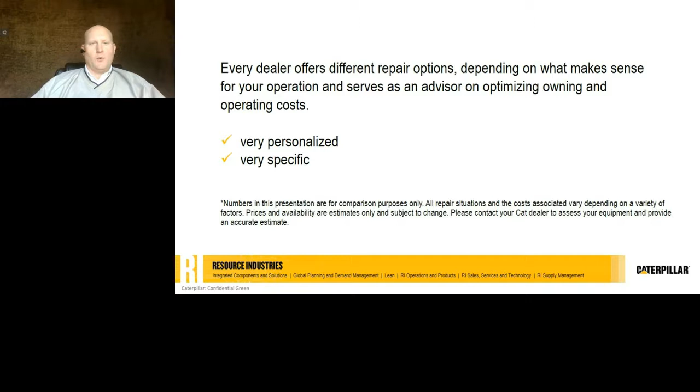Now we're going to move into the value of repair before failure. So why repair before failure? What's the benefit of that? As a lot of you can imagine, CAT parts are designed to last multiple lives, which means we've designed reusability into our parts, and we'll talk about the level of our parts in the next couple of slides.

We also have failures is expensive. In most cases, it's 2.5 times more expensive for an after-failure repair versus a before-failure repair. And also, when we run those components to failure, we potentially could cause contingent damage to parts that don't need replacement, and we'll talk about that in future slides as well. With the proper component management processes and procedures, 90% of the failures can be prevented.

And you'll see the chart to the right here. That's what that illustrates.

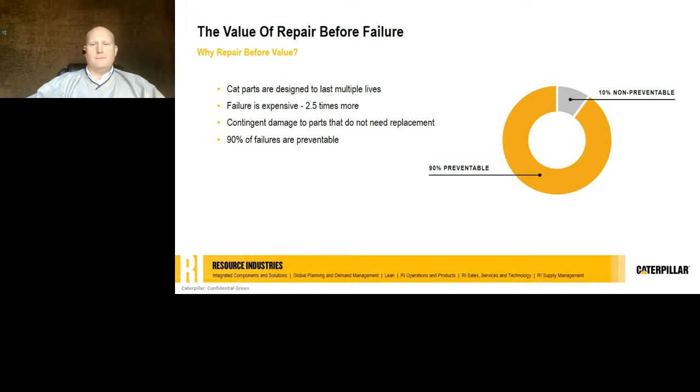Why repair after failure? So there are reasons why we would do repair after failure. One of those is why fix it if it's not broken. One of the side effects of that, though, is it will fail at some point and cost more to repair if we do run it to after failure. Repairing early will save money down the road as well, and we'll cover some of those repairs potentially in future slides.

Production demands require us to keep the machine running, so current production is more important than taking the machine down for future breakdown. But failure down the road could have a negative impact on the long-term production. So if we're not planning these repairs and doing it before failure, that could definitely affect our production targets and goals.

Turnaround time is too long. Every repair takes a certain amount of time, but the key here is repair after failure often takes longer than a before-failure repair. So keep that in mind.

And then we can't forget about the operator as well. Operator communication when experiencing machine problems could involve a lack of communication between shift changes, between the operations and production teams. It could be a different array of reasons why we might not communicate a potential problem, or we might just not communicate that problem because we want to keep that machine running so we can have production.

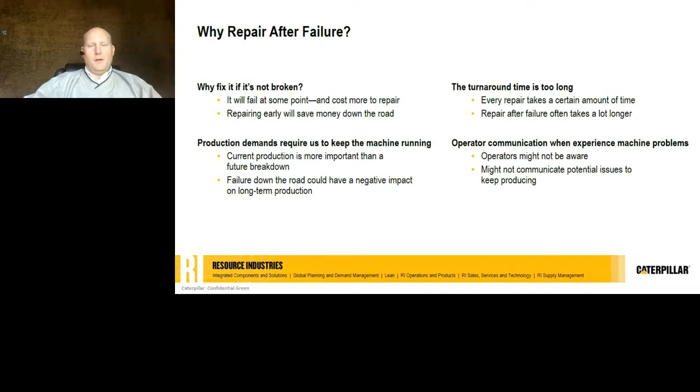Next, we're going to move into the levels of CAT parts. Each level has a built-in strength to extend machine and component life. But more importantly, we want to capture that built-in value of your overall machine purchase by reusing those parts that are designed to be reused.

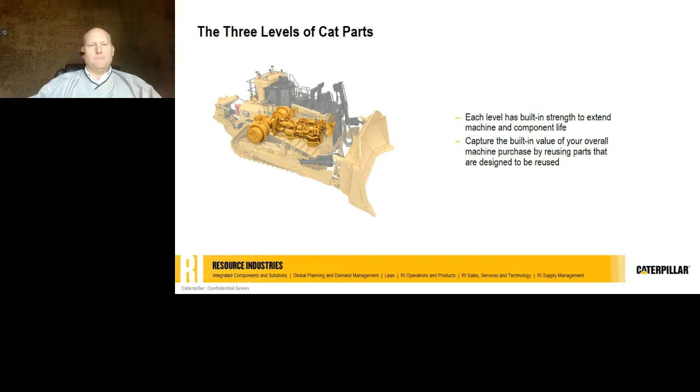Level 1 parts are your fast wear parts. So those are the parts that mate against those level 2 and level 3 parts that protect that investment. Those level 1 parts—I have a powertrain example here, and you'll see some pictures to the right—include bearings, gasket seals, piston rings, anti-friction bearings, thrust washers; those type of things would be considered your 100% replacement parts as your level 1 parts.

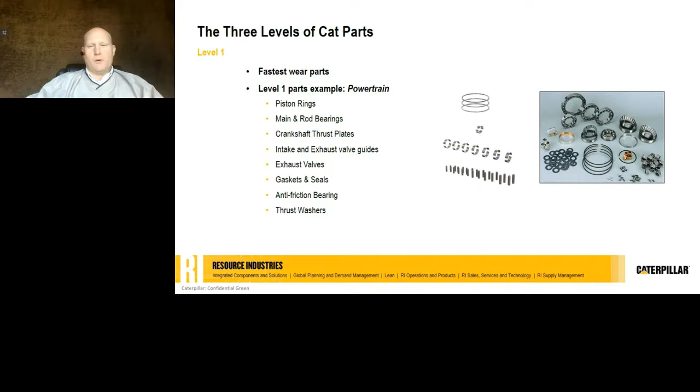Next, we're going to move into your level 2 parts. Level 2 parts are your slow wearing parts, and the key to your level 2 parts is they're designed with reusability in mind. Those parts are your pistons, your gears, shafts, discs, and those type of parts.

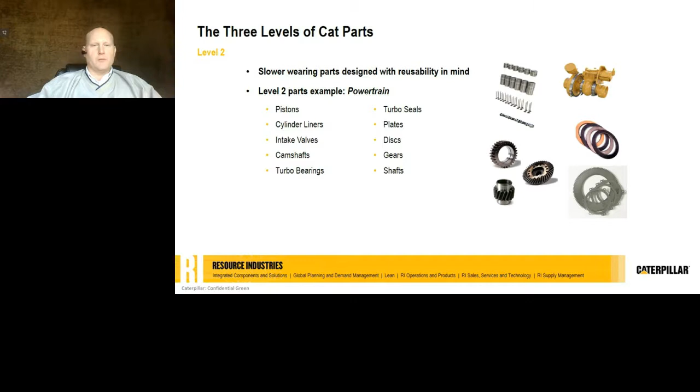Caterpillar has reusability guidelines and processes for our dealers to follow regarding those parts. We can either salvage some of these parts to extend their life, but if they do not meet specification, we throw those away. Your level 3 parts are supposed to be designed for the life of the machine. These before-failure repairs are critical. If repairs are needed, component failures can increase cost dramatically.

So if we're running the components to destruction or to failure, we don't want to be ventilating blocks or breaking wheel group housings and those type of things to where we can't salvage those items. Additional examples are your connecting rods, parts that have multiple lives and in most cases last the life of the machine, and should never need to be replaced as long as we're doing the before-failure philosophy.

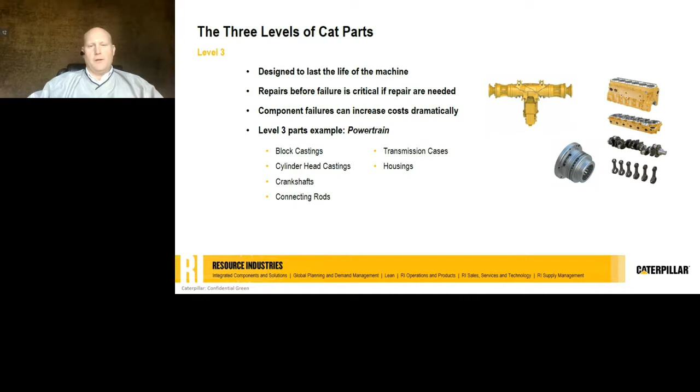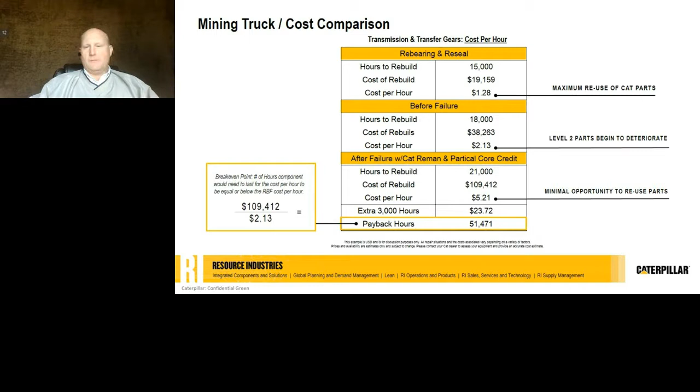Managing your CAT components, there's 4 areas that we focus on. First and foremost, you want to have good preventive maintenance practices, following the operators and maintenance manual. If you decide to do extended oil intervals, you want to make sure you have the SOS and you're religiously checking those samplings to make sure we don't have any contaminants in our oil.

You want to take advantage of your lower level repairs. In the previous example, you want to make sure you're not running those components, pushing the limit where you start deteriorating those level 2 parts and eliminating reusability, or running those components to failure where you have to start replacing those level 2 and level 3 hard parts. You want to pay attention to your planned and problem indicators, making sure you have good documentation and history for your planned events.

When you have those problem indicators, like a machine not scheduled for maintenance and those type of events, we're documenting that. There could be a problem looming that we're not sure what it is yet, but we're documenting it and putting it in our repair history, and obviously planning and scheduling repairs to avoid unscheduled downtime.

If we can get to a schedule where we have planned repairs, that obviously benefits production, and we can schedule around that and move our fleet to where we need to move them to get production. Also, contact your local CAT dealer if you need help in these 4 areas.

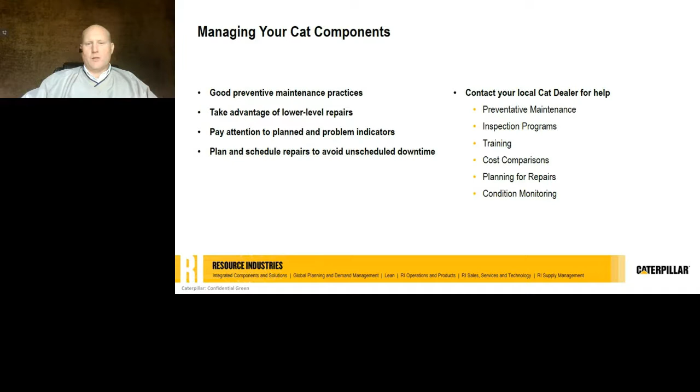We can help with planning for your repairs, and then also condition monitoring. We can help with that as well. Condition monitoring is the next slide we're going to move into.

Condition monitoring is critical to identifying repairs before failure. You'll see the 5 circles within the condition monitoring elements. The top one, SOS fluid analysis, is very, very important. Highly recommend doing that so you can really understand the health of your components in your machine.

It's a limited monthly assurance program to make sure you're watching those components and catching things that potentially could cause an after-failure event, which could affect your investment down the road.

Inspections, whether that's walk-around inspections, TA1s, TA2s. Site conditions have a large effect on your repair-before-failure as well, whether you're running a high-speed, long-distance haul, or you're climbing out of the pit at low speeds, high RPM.

Repair history as well—what you've done in the past might not meet or match what you need to do in the future. So look at your repair history, identify what you've done, how you've done it, and if it was effective. And then all your electronic data.

That's all your connectivity data, fault codes from sensors, ET, and all the data, Product Link associated with that, fuel burn, and all those things. So those are your 5 elements of condition monitoring that's important to help you with your repair before failure.

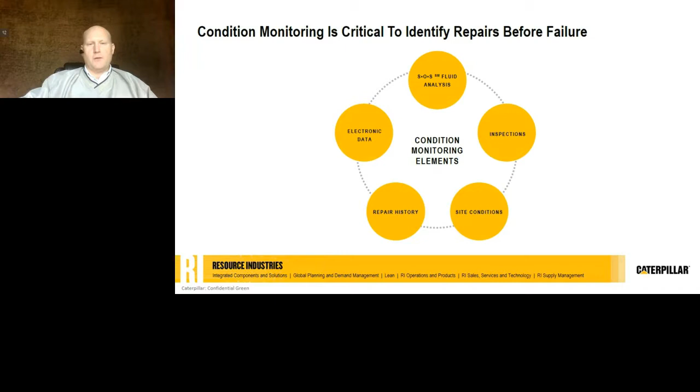So we'll start with broad range of options. We want to have the fullest range of repair options possible for the fleet that's in your territory or for your operations.

That could range from low-level repairs like a re-bearing reseal up to new, and everything in between, whether that's dealer exchange or maybe a re-bearing reseal plus, which we'll go over the framework of in the next slide. But the reality is we want to make sure we offer that broad range of repairs, and where we do see gaps with our dealers, we want to make sure those gaps are filled to support our customers.

We also want to have expert advice and repair. We want our dealers to be the expert in keeping equipment running, and focus on the lowest owning and operating cost, understanding customer purchase drivers so we can offer and deliver on what's important to the customer for whatever situation they're in, whether that machine is going to be owned and operated long term, or it's cycling out of the fleet.

Being able to have expert advice and repair, to consult with customers and be that trusted advisor, and then also have timely quote and repair as well.

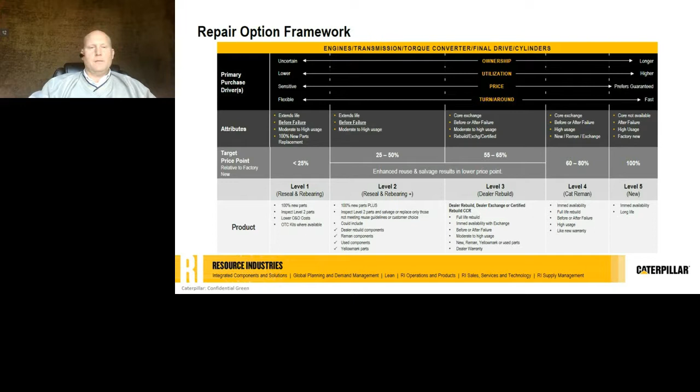As we do our lower level repairs, we're analyzing key indicators. So we have a key indicator that potentially tells us, hey, we might want to look at redoing this, re-bearing this turbo, or maybe doing some heads, or your mid-level repair, which is maybe a top end as well, to get you to that desired point of your dealer rebuild. When you start pushing these and not doing those repairs to get to your desired rebuild target hour, as you get into the at-risk zone, if repair is not completed, your options are not as broad.

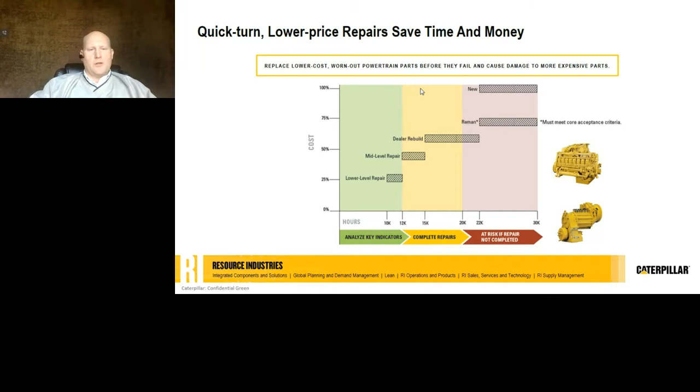So that's the other benefit of doing your lower level repairs. You're planning for before-failure repairs, which will save you time and money in the long run.

Advantages of completing lower level repairs: protects and extends the life of your major components by replacing inexpensive wear parts. Those are your level 1 parts, as we talked about earlier, protecting those level 2 parts for reusability and avoiding catastrophic failure that could potentially damage that housing, which would then need to be replaced.

As it relates to engines, you can restore fuel efficiency to its optimal level, reducing your fuel costs. So maybe we need to do a mid-level fuel system rebuild, but the rest of the engine can last for another 6,000 or 7,000 hours. So we get the complete component to the target life.

This allows you to schedule downtime, plan for maintenance and repair costs, prevents oil leaks by replacing worn out gaskets and seals, reduces oil consumption, and also increases machine productivity by completing repairs before they result in catastrophic failure, as we mentioned in the last couple of slides.

As we start to understand where your fleet is and your hours and operations, there are questions our dealers ask to understand where your component is and what's the best solution. Every situation is different, so how do you choose the best repair?

So as we walk through the four items - ownership, utilization, affordability, turnaround time - that helps our dealers hone in on what's the best solution from a component rebuild for the customer, whether that's, are we going to keep that machine for the long haul, or are we going to be transitioning that machine out of the fleet in the next couple of months?

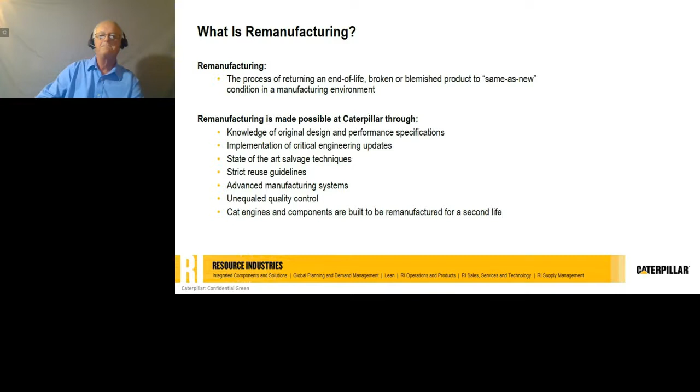So what is remanufacturing? And it's interesting, as I've talked to people over the years, a lot of people will use rebuild and remanufacturing synonymously. And in fact, they're 2 completely different processes. Whether it's a rebuild, repair and return, or rebuild and return versus exchange components that your dealers have available for your machines. Basically, what that does is you disassemble the part, you inspect everything, you replace the wear parts, the reusable parts are put back in and back into the same housing or case.

Versus reman, when we get a core back from reman from a dealer and customer, we completely disassemble that after cleaning. We inspect each individual part, and it goes into a parts bin to be used on your manufacturing line. If it cannot be salvaged or does not meet reuse guidelines, then we'll scrap it and put a new part in the bin in its place, and then we assemble this. And the big difference is on a rebuild, every part that's reused goes back into the same component versus reman. The likelihood of all those parts that came out of the original engine, for example, will not make it back into that same engine. So it is truly a manufacturing process that's using the core as its prime raw material versus new material.

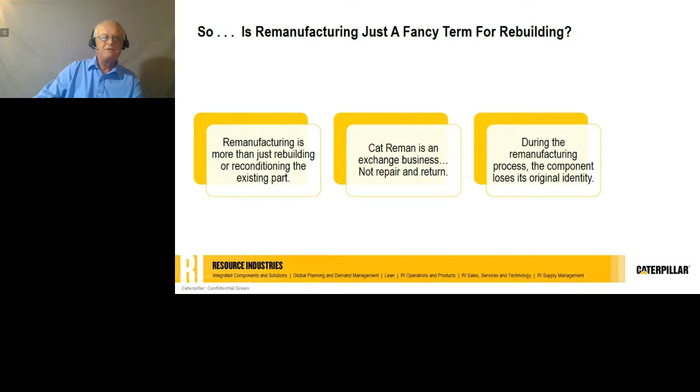So how does it work? As you buy machines and commission machines, you put the machine to work, you utilize it, it does its job, you follow your regular maintenance program, and as it gains hours, you wear out parts in various components within those machines. So when we look at the life cycle of the reman side, we will then take that core, as mentioned before, as our raw material. We'll clean it, we'll salvage it, we'll test parts, we will rebuild a component using used parts and some level of new parts, test it, and it goes into the supply chain.

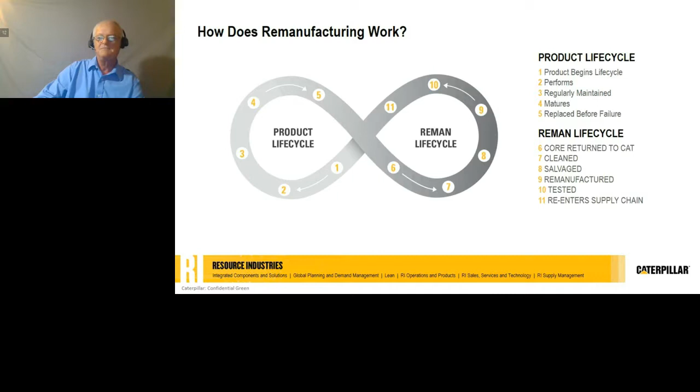So what type of products does Caterpillar offer? We have a broad offering of reman products available, from piece parts like injectors or crankshafts or monitors, ECMs, subassemblies like short blocks, long blocks, all the way up to complete components that you can see there on the right-hand side.

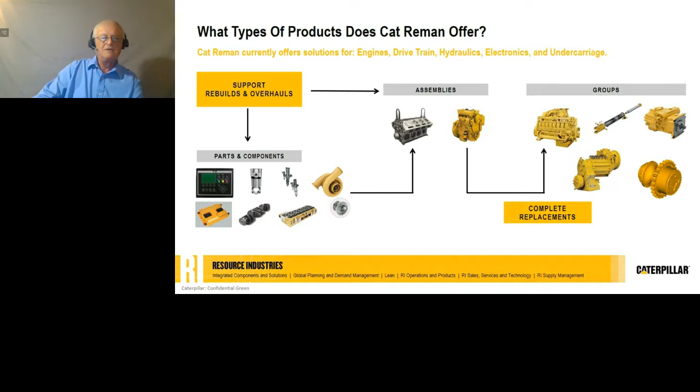So when is Cat Reman the right solution for you? That I would recommend you have that conversation with your dealer. It is a real good solution when the shortest turnaround time is needed. It's also there to support the dealers. It is affordable when you compare it to new, and the benefits of it, you get same as new performance, same as new warranty. Again, we talked about the engineering updates being added, as well as it reduces your repair and overhaul costs and downtime compared to using new components or a rebuild and return type of program.

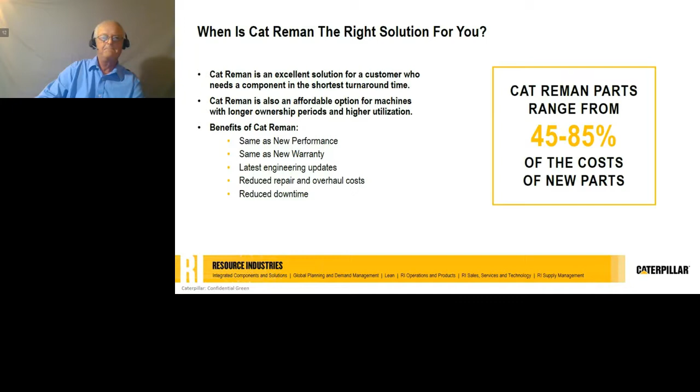So how do you know what's available from Cat Reman? Again, please consult with your local Cat dealer, and you can also look at the Reman portion on parts.dealer.cat.com.

So as John went through the repair option framework, Reman is a very important product of the many options that are available from your dealer, and it may make sense in a lot of cases, and in other cases you may choose to rebuild.

So we're going to move into our Caterpillar certified rebuild programs. We have 4 levels: a certified CCR, or CAT certified rebuild, which we refer to as a full machine rebuild; CPT, or certified powertrain rebuild; CPT plus, which is additional parts above and beyond the standard CPT; and then a certified machine component rebuild. And we'll go into a little bit of detail on each of these.

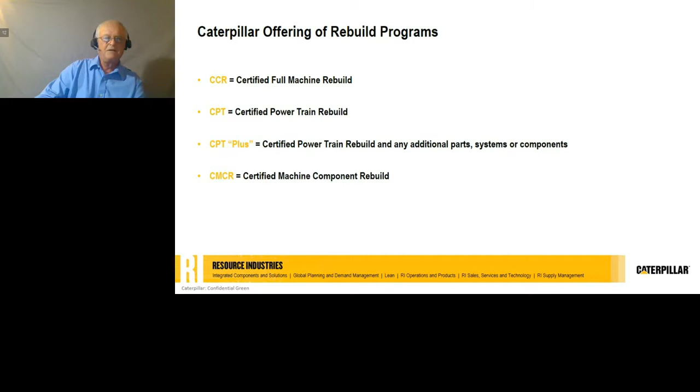So what is it? There's a lot of things, and I'll point out a few. The key here, when we do a full machine certified rebuild, you do in fact get a new serial number. It uses the same serial number prefix as the original, but we change the serial number itself.

Just like Reman, updates or critical updates are incorporated. If you're in a highly regulated area, it's a great time to upgrade your engines to a higher tier level, and it's rebuilt like new. There's some people directly involved with the certified rebuild programs that will say in a lot of cases it's better than new because all the critical engineering updates are incorporated.

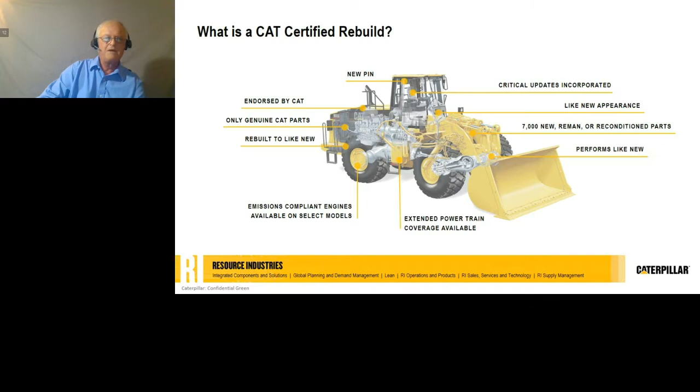What is it? Again, it's a complete rebuild process endorsed by Caterpillar. Only Caterpillar dealers can use it. They are the only ones that have all the specifications and technical documentation to do a certified rebuild. A lot of parts either get new or reconditioned.

We do have critical or required parts to be replaced. What's interesting is if it's a required part, but there is a reuse and salvage guideline associated with that part, that takes precedence. There are optional updates and upgrades that you can include in a certified rebuild, and it looks and operates like a new machine.

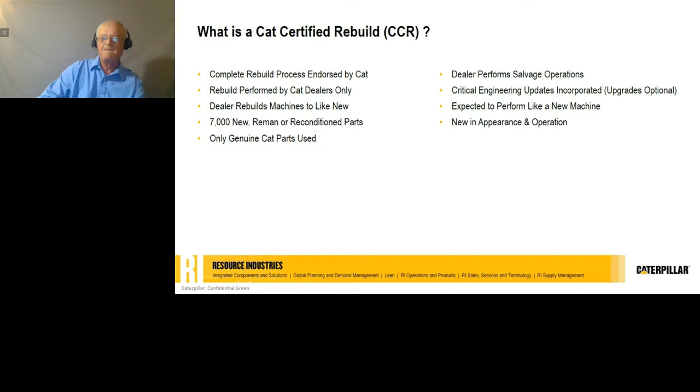So I have a question here on inspection. What is a TA1 and a TA2? TA stands for technical analysis. A TA1 is basically a physical walk around with a recommended list from Caterpillar by machine model, by machine product group that looks at the condition of the machine.

A TA2 is done in conjunction with the TA1, but it does a lot more inspections. It will do the fluid analysis, check pressures and flows, and those type of technical checks.

Yes, for certified rebuild, the dealers can use new reman, or even dealer exchange parts and rebuilt parts as well. The second question.

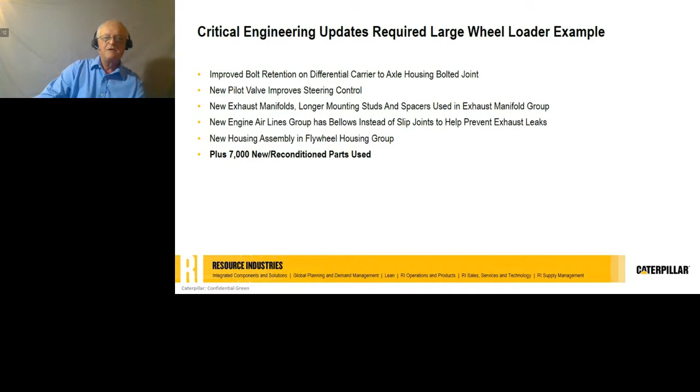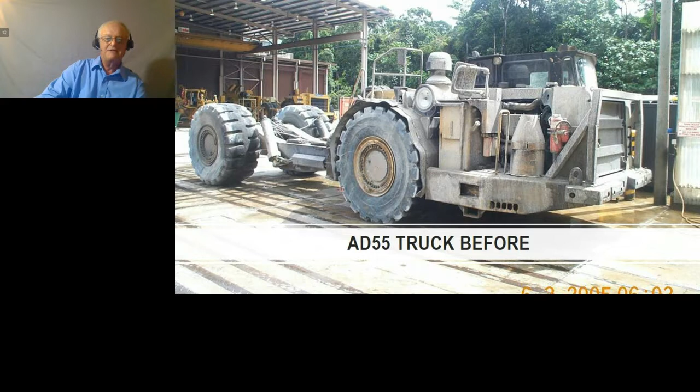This underground truck was in pretty rough shape. That's what it looked like when it arrived at the dealer. And that's what it looked like after the dealer completed the rebuild.

One more example: here's a 793 that obviously was decommissioned to do the rebuild. And these are the portions of the machine that were ready to get shipped back to the mine site to get recommissioned.

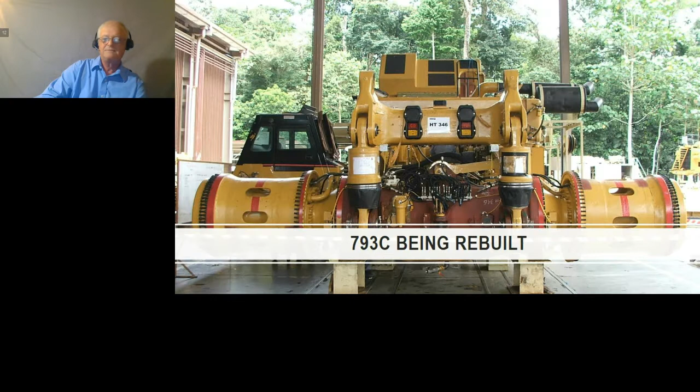We have another question in the chat, Tim. Q&A. Yeah, I see, I'm reading it. Okay, sorry, I didn't know if you saw. Do you provide a base paper certification? Yes, plus you will receive a new serial number plate as well. Okay.

So CAT requirements: we do have required specifications and required parts replacement. And as we talked earlier, if salvage and reuse guidelines are associated with that required part, those take precedence. Again, there are optional engineering updates as well as upgrades and retrofits that can be added during the process.

There are required documented time checks that our dealers perform. The key is, and we'll get into the CPTs in a minute, you can do multiple CPTs on a machine, but Caterpillar only allows a full certified rebuild once on a machine.

So what's in it for you, the customer? In a lot of cases, a certified rebuild is in that 50 to 60% of a new CAT machine. You get the new warranty on new parts. There is extended coverage available on the powertrain as well as financing.

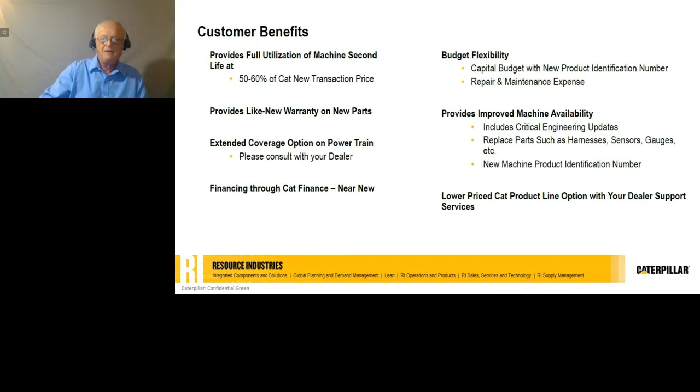So again, why the rebuild program? The biggest reason is Cat machines are built to be rebuilt. It helps you maximize production, with like-new machine coverage. A lot of customers will do a certified rebuild because they have experienced operators that like that machine—they are very efficient operating it, and may be a little reluctant to go to new technology. That's another reason why a lot of customers will do a certified rebuild.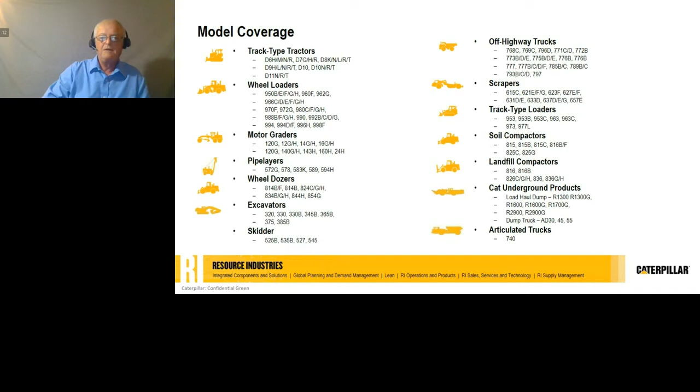We get requests for additional machines on a very regular basis. So let's talk about a certified rebuild or certified powertrain.

In some cases where we have a full certified rebuild documentation, basically we take the powertrain subset of that documentation for the certified powertrain. You can see this is typically what's done on a wheel loader, from the radiator up through the final drives. In some cases, we only have the highest level certified documentation at the powertrain level, but you can see the major components during a CPT are done.

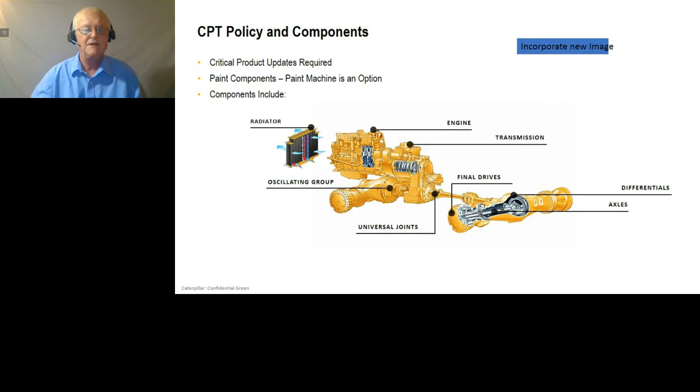This will give you a different perspective from a haul truck. We do require that the components being rebuilt in a CPT be painted. It's up to you as a customer to decide if you want to paint the rest of the machine or not.

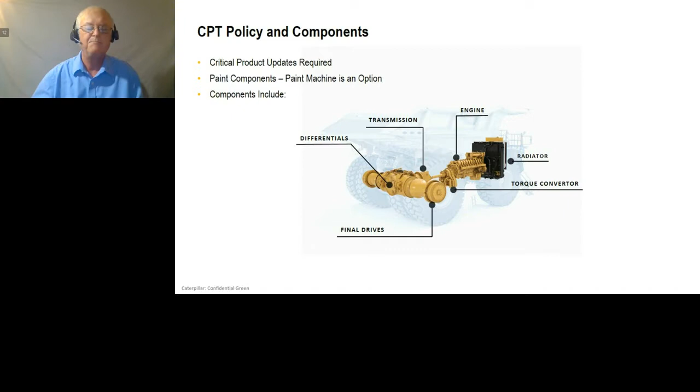Again, it's from the radiator through the finals. Optional coverage, extended coverage is available, as well as financing - please consult with your dealer. We have a little over 1,600 serial number prefixes available within the CPT program.

This is just a list of the components that we would require to be used in a certified powertrain. The key one I want to point out is on the right-hand side, near the bottom, where it says electronic controls and sensors which function to direct power to move the machine. Those will be required to be replaced as well.

Let me go back a slide. The difference between a CPT and a CPT Plus - the CPT Plus is exactly that. Working with your dealer, you may choose to do additional parts of the machine. You may want to do some cab work or upgrade a cab - that's a very good example. You may want to put some upgrades or retrofits on it, maybe improved egress ladders or things like that.

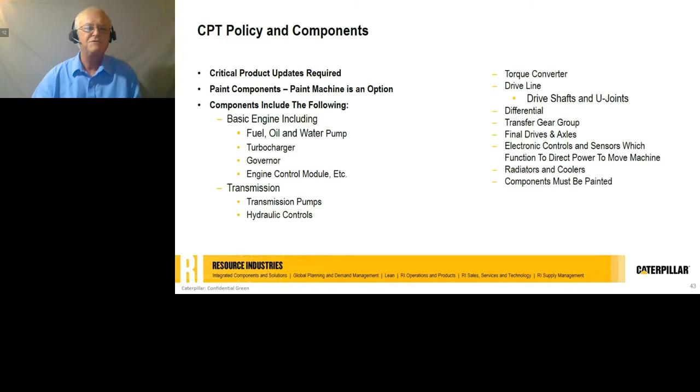We also have the certified machine component rebuild, which is part of the certified rebuild programs. Components covered today are engines, machine engines, transmission and torque converters - depending on whether they're in individual housings or the torque converter is in the same housing as the transmission - axles, final drives, and differentials.

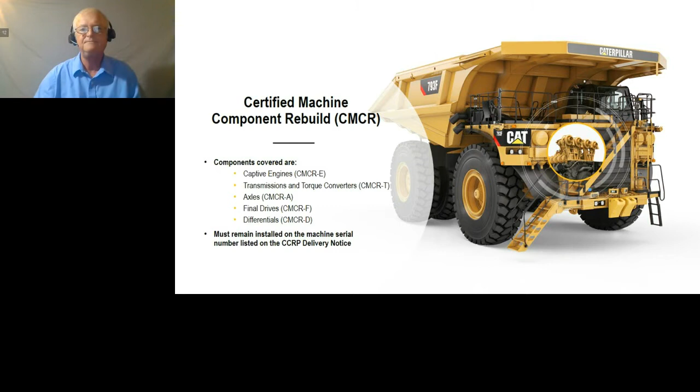So what's in it for you as the customer? Along with all the repair options and reman that John talked about, CMCR is there. It gives you a complete suite of machine options to choose from with your dealer, from rental to CPT Plus, used, dealer rebuilds - you may choose to use the dealer rebuild over the CAT full certified rebuild - and obviously the certified rebuild as well as new.